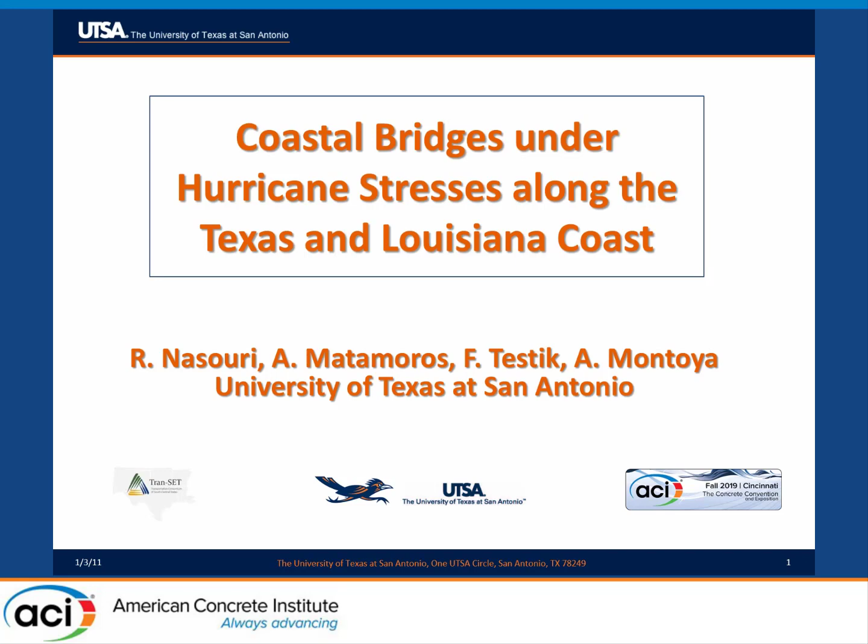So presentation today, we're interested in understanding a little bit better the nuts and bolts on damage that might happen in bridges. If we look at past events like Katrina, where there was significant damage to coastal infrastructure, the risk we face in terms of hurricanes is just as big, or by many instances higher, than we face from earthquakes, and I don't think we have paid enough attention to it.

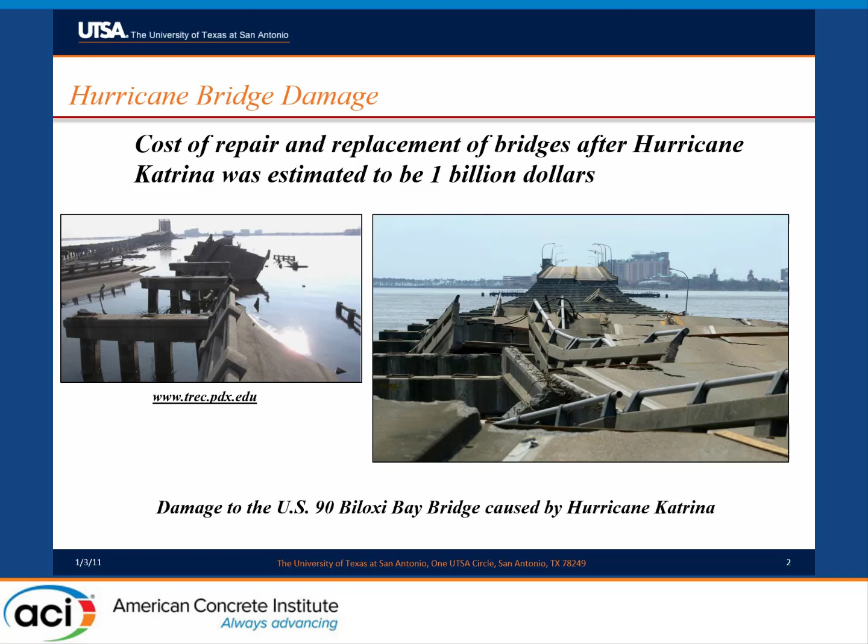Certainly there's a lot of work to be done from the analytical perspective and new tools to be used to address that problem. So the focus of our work is estimating hydrodynamic response of bridges.

When we look at the hydrodynamic forces on a bridge, there are a set of parameters that are going to affect how big that force is and how likely the bridge is to be damaged.

Some of them are related to the water itself: the wave, the shape of the wave, the period, wavelength, the wave height, and in some context the storm surge as well. But there are also parameters associated with the bridge, among them the geometry of the bridge, the flexibility of the substructure, and others.

Our development of design provisions for hydrodynamic forces, even though people have made efforts, I don't think we have invested anywhere nearly enough. There's a couple of approaches commonly cited in the literature, by Douglas in 2006, which is a simpler approach to estimate hydrodynamic forces.

And then there is the AASHTO approach in 2008. The equations are far more elaborate than the equations cited by Douglas, and I think we're still learning about how to best utilize those equations.

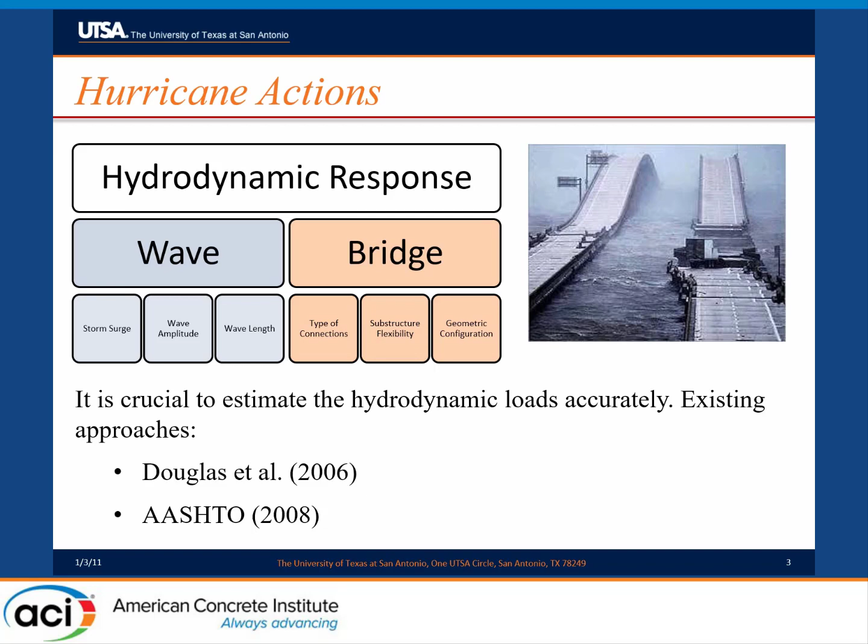So in the broad sense, if you look at the 2008 AASHTO provisions, which I believe were developed as the byproduct of a pool fund study, they identified two cases. They think of it in terms of uplift force and horizontal force, and these two don't necessarily occur concurrently, so there are equations for estimating the maximum horizontal force on the bridge.

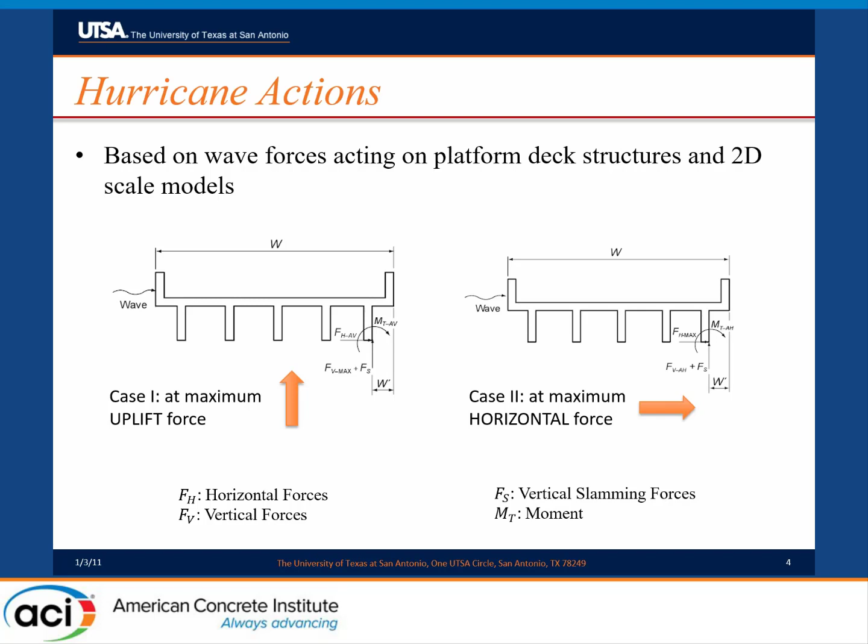And then the uplift force associated with that, and vice versa: you can estimate the maximum uplift force and the horizontal force associated with it. The provisions would have you evaluate both cases to identify which one's more critical, based on a given set of wave parameters, being wavelength or storm surge, wave height, and so on.

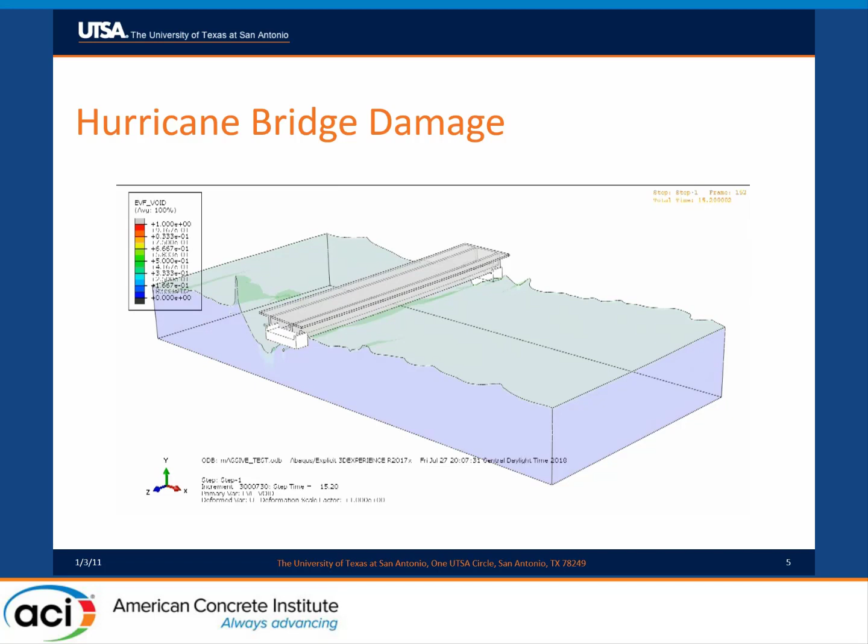What happens during a hurricane is you get waves impacting bridges and causing unseating, and then afterwards you see a lot of damage. A simplistic way to approach this would be to say, well, you restrain in the horizontal direction and you're going to take away the problem. But that's not necessarily true.

If we look at damage images after Katrina, there were spans that had some reinforcement through the connection, and the uplift forces were so strong it was ruptured. So having shear keys is not a guarantee that the bridges will subsist, and I think that's something we need to take to heart also when we're designing new infrastructure to avoid that problem.

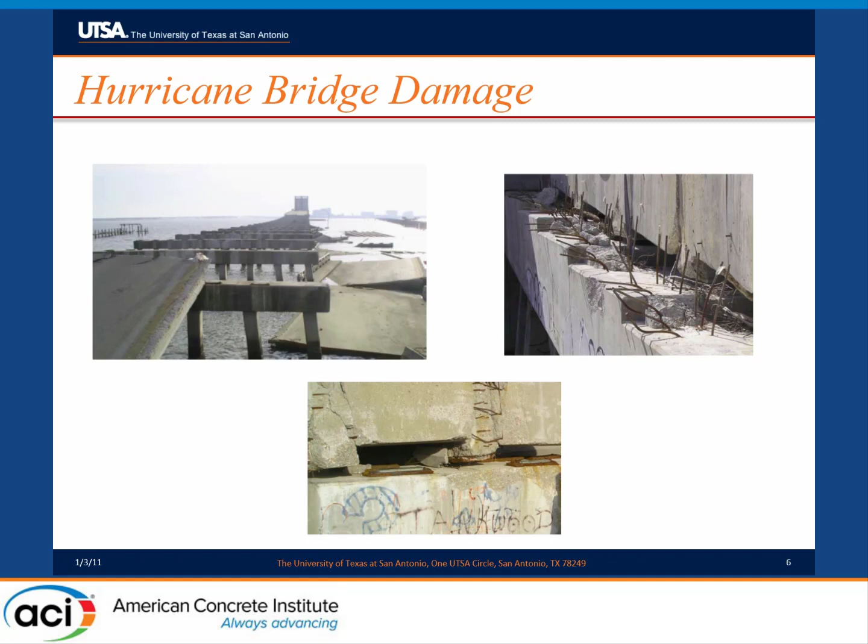So as I was mentioning, the methodology we chose tries to take advantage of some of these multi-physics fluid structure interaction tools that are becoming available, techniques like coupled Eulerian-Lagrangian analyses, among others that are available. So when we started this, we went on to evaluate a few and figure out which one could yield the more immediate results.

And we began to develop some high fidelity models, which we calibrated with some experiments that are out there. Eventually our goal is, like the previous speaker was saying, understanding a little bit better what the fragility is, so we can run arrays of simulations where we vary hydrodynamic conditions and bridge geometries and different characteristics to understand better what type of damage we can expect. You could also use that information to improve the way we design new bridges.

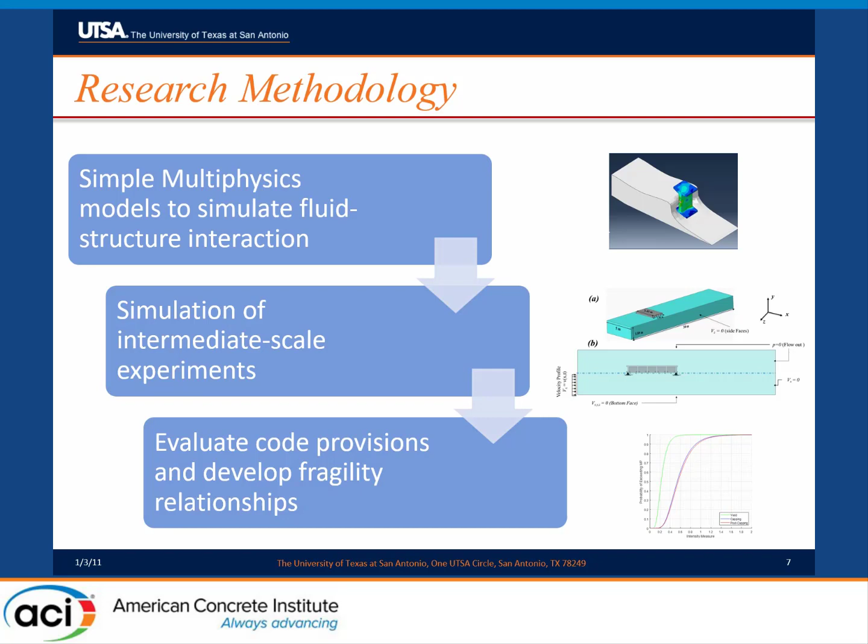So as I mentioned, the approach we adopted was a coupled Eulerian-Lagrangian approach, meaning we use different sets of equations to model the fluid than we use to model the solid. If you're a structures person like myself, you're very comfortable in the Lagrangian domain and quite comfortable with equilibrium equations. We do a lot of that here in ACI.

But folks who work in the fluids domain use a different coordinate system - a Eulerian coordinate system. It's a little bit different. There you work in terms of equations of state, and you have different sets of equations.

So a lot of analyses today would have these two approaches implemented separate from one another. Somebody would do a Eulerian type analysis assuming the structure is rigid, then estimate forces and pressures on the face of the structure, and then come to a physical model, a Lagrangian model, and impose those forces.

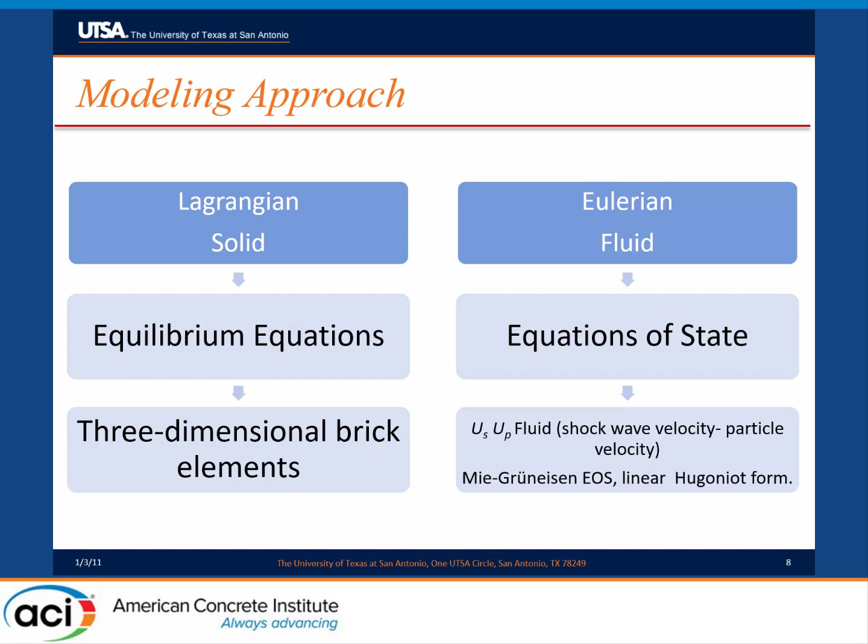What we're trying to do is couple the two, solve simultaneously, so the flow and the deformation in the structure can change in response to changes in each other. They will interact with each other. So as I was mentioning, these two approaches are a little bit different.

In a Lagrangian mesh, the approach is that the points in the mesh are attached to material, and as the material deforms, so does the mesh. The mesh deforms with the material.

In the case of Eulerian analysis, the approach is the opposite. You keep the mesh in place, and materials flow through, and you track velocities for the most part as they move through the mesh, or particles as they move through the mesh.

Lagrangian meshes are very good at dealing with small deformations. Eulerian meshes are much better suited in situations where you have fluids, where there are very large deformations, or even in solids, when the deformations are going to be very, very large.

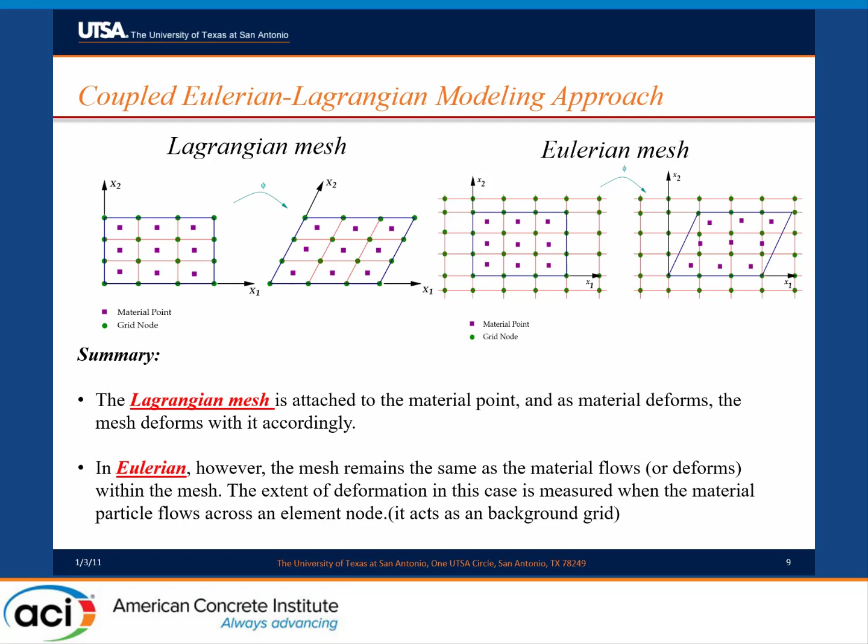Because every one of us who's done a little bit of finite element work, or even simpler analysis, understands that in your Lagrangian mesh, as things begin to deform excessively, all kinds of numerical problems arise. So that's the advantage of Eulerian meshes over Lagrangian meshes.

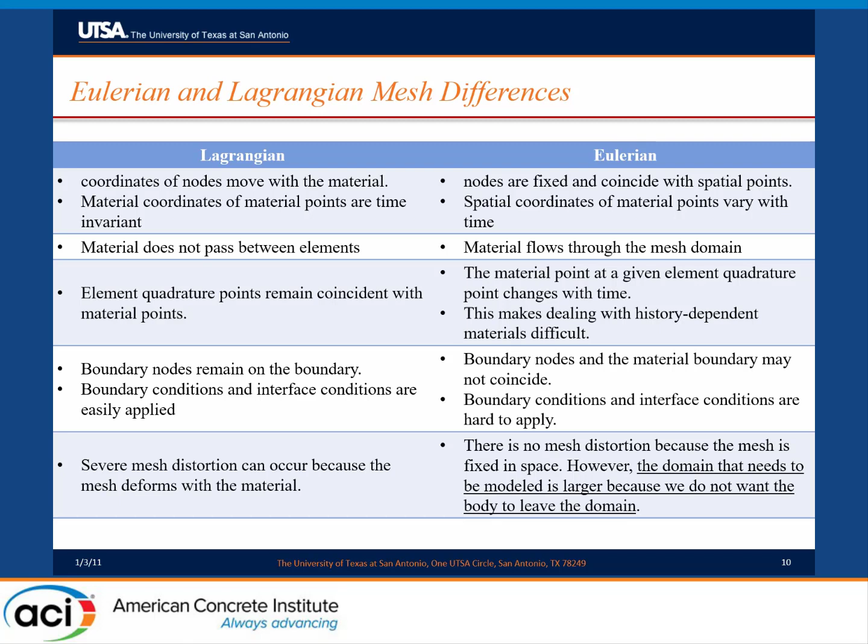These are some of the features that I was mentioning, probably a little bit late in the day, so we'll say that I already covered that. And I'm going to show you some of the simulations.

This is a very simple simulation just to illustrate what's going on with the fluid, the flow. To model the effect of both the fluid and the solid, it is important that you model the velocity field appropriately, and that your fluid is able to adapt to changes in the shape of the solid, so you get proper flow around the solid.

As you can see, if you look at the bottom of that I section, the fluid behavior here is highly turbulent. It's very, very difficult to simulate with a simple model that type of interaction.

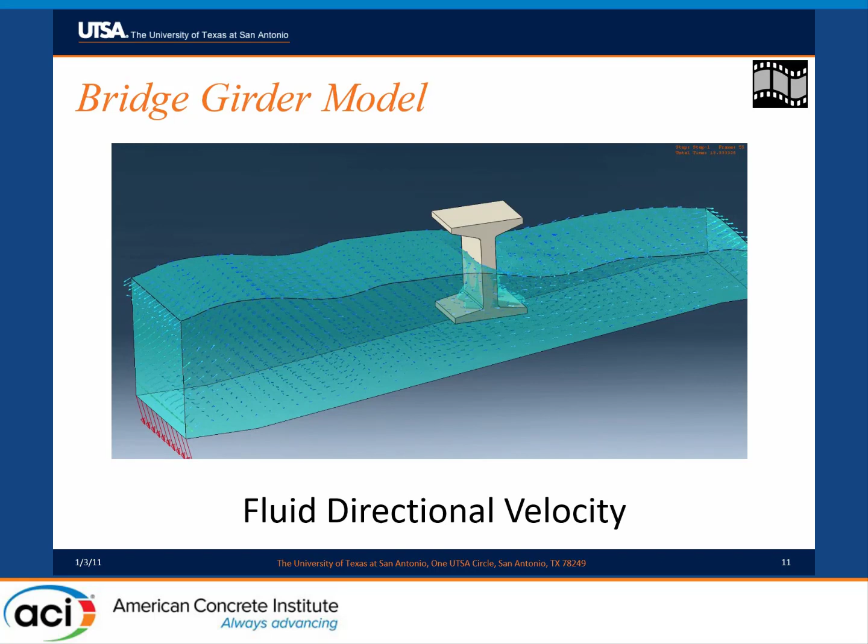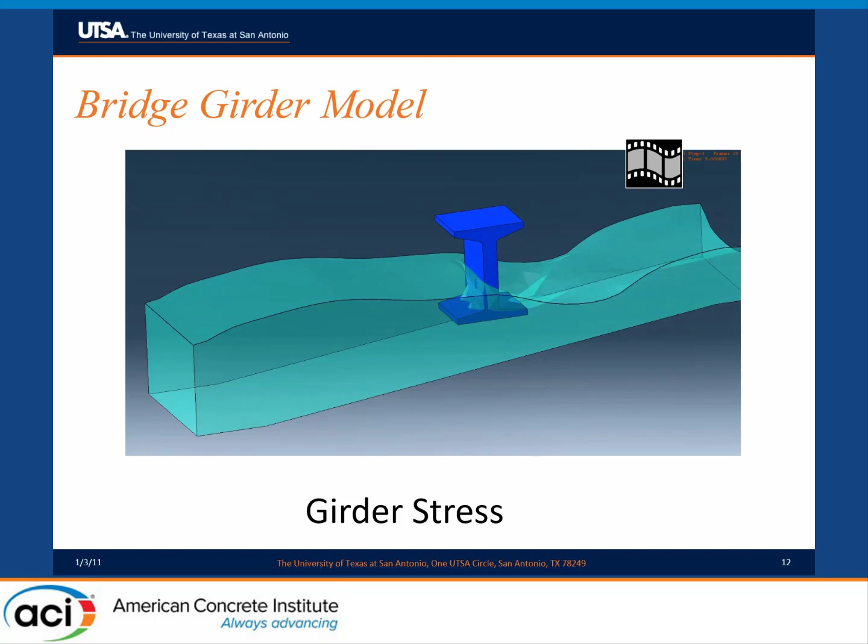At the same time, we're concerned about what is happening in the solid. So in this case, we're amplifying stresses significantly, but the point being is that as the fluid impacts the solid, then you calculate stresses and deformations in the solid. So the two are speaking with each other in real time.

I think one of the biggest challenges we face up front is to develop some confidence in these models before we go out and extrapolate and look at a wide set of parameters and variations, and we have to be able to trust what the numbers are going to give us. That's one of the motivations for using this type of analysis.

Fluid structure interaction problems are very, very difficult to simulate in the lab. They're very expensive. Flumes are not big enough. So they typically suffer from two problems: the scale factors are very large, structures are very, very small compared to prototypes, and of course there are some size effects involved, and that limits the ability to project what you learn from flume tests to an actual bridge.

And then, of course, the other problem is people typically don't simulate the substructure in their flume test. Everything is rigid and fixed, so you're missing what might be a very important dimension in the response of the bridge.

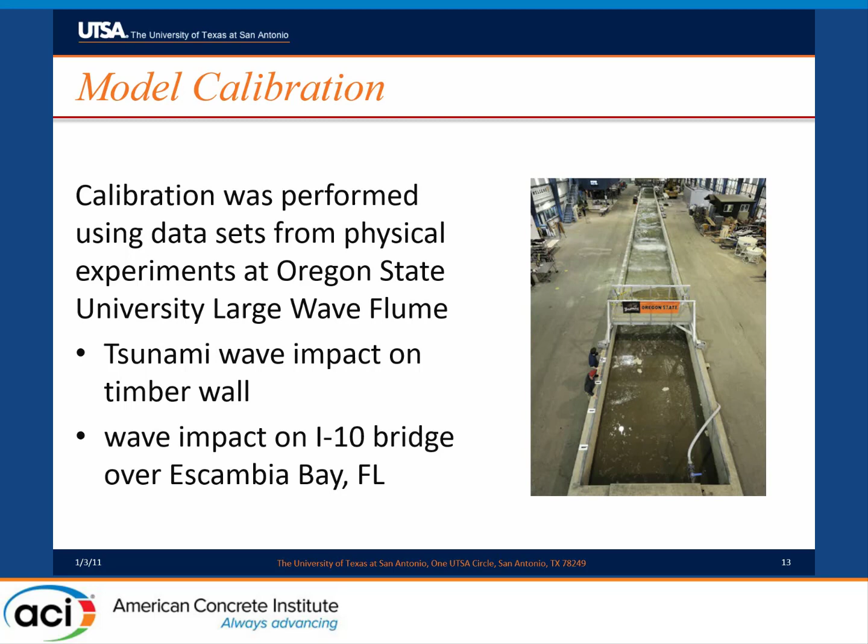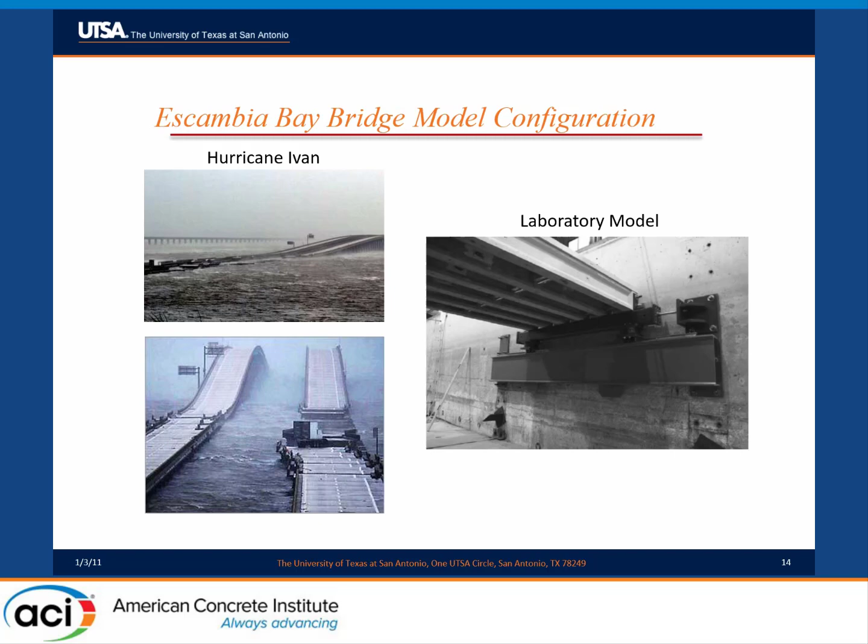We looked at some tests done at Oregon State, some funded by the National Science Foundation, where in their flume they simulated the impact of a wave on a timber wall that was instrumented. There's also a study on a 1:5 scale model of the Escambia Bay Bridge, which was damaged during Hurricane Ivan, where springs were added to the bridge to study the effect of substructure flexibility on the total response - something seldom done, and certainly not done in the development of the AASHTO equations in 2008.

So we built a finite element model of that bridge. As I mentioned, this is a coupled Eulerian-Lagrangian approach. The solid is modeled in the Lagrangian domain, the fluid defines a Eulerian domain, and we define boundary conditions that allow water to come into our model and go out of our model.

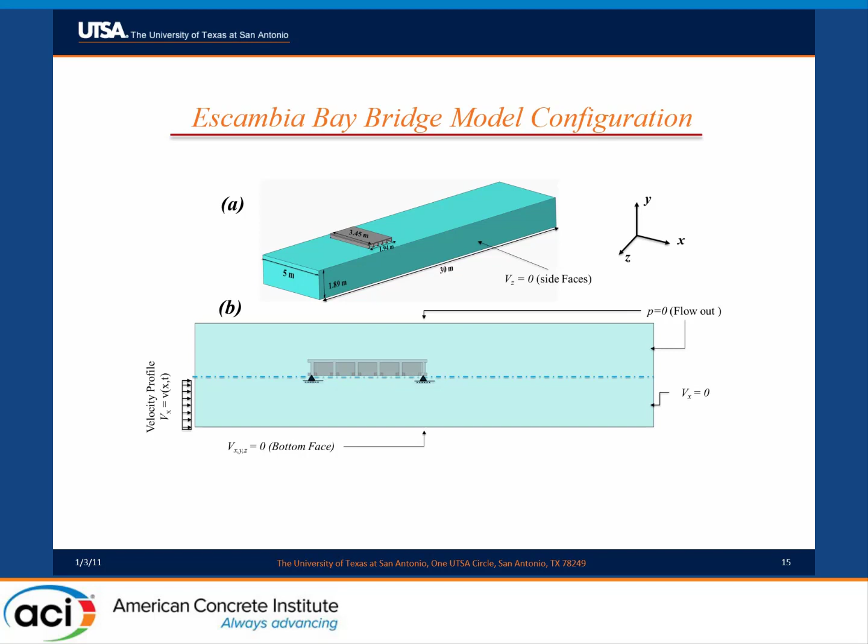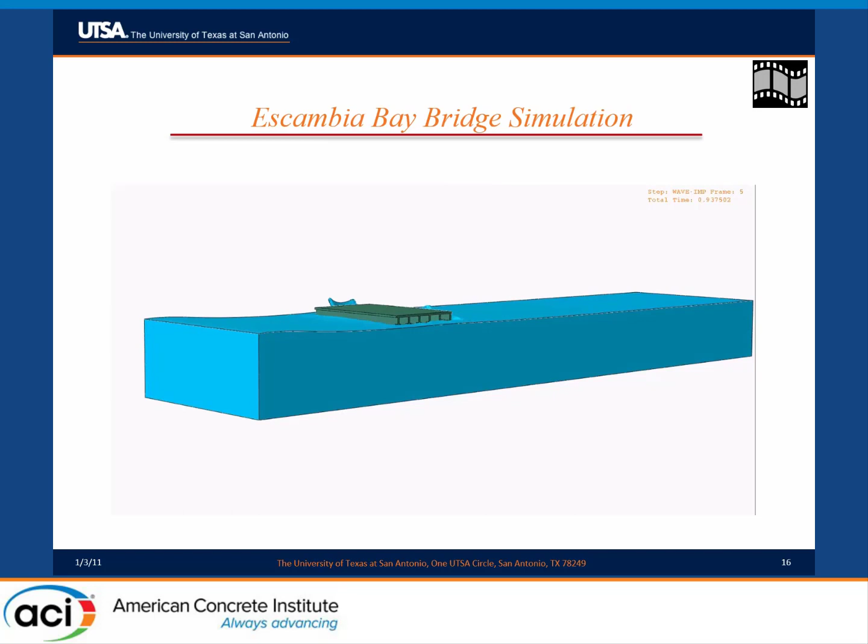This shows a typical model where we set the storm surge level right below the bridge girder, and then simulated a wave that impacted the bridge. It may seem simplistic when you look at it, but we spent quite a bit of time learning how to simulate waves so that they have the velocity, amplitude, and wavelength we actually intend for them to have.

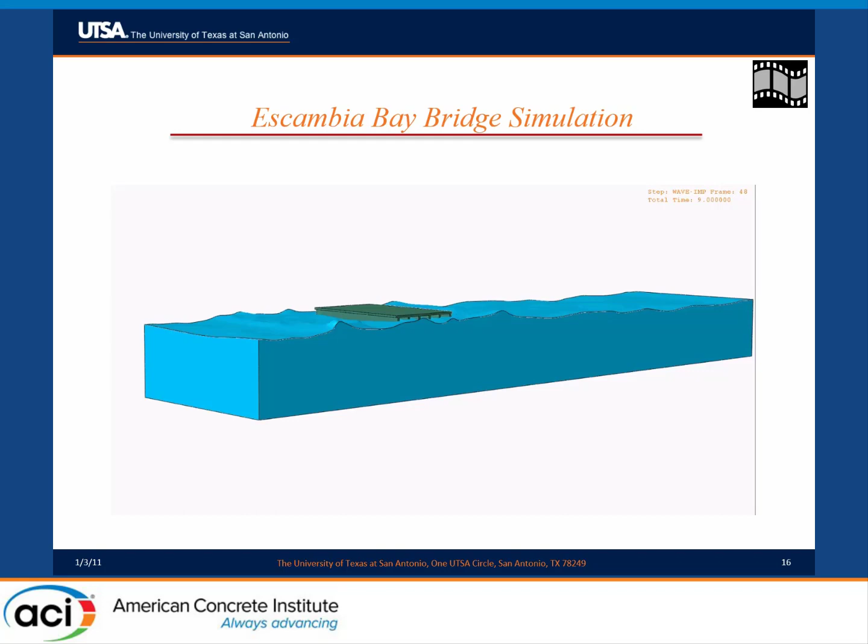So there's quite a bit of trial in understanding a few tricks of the trade in order to get this thing to work. So when we first ran our first series of simulations, we were just trying to compare what happened in the Oregon State model with our computer models.

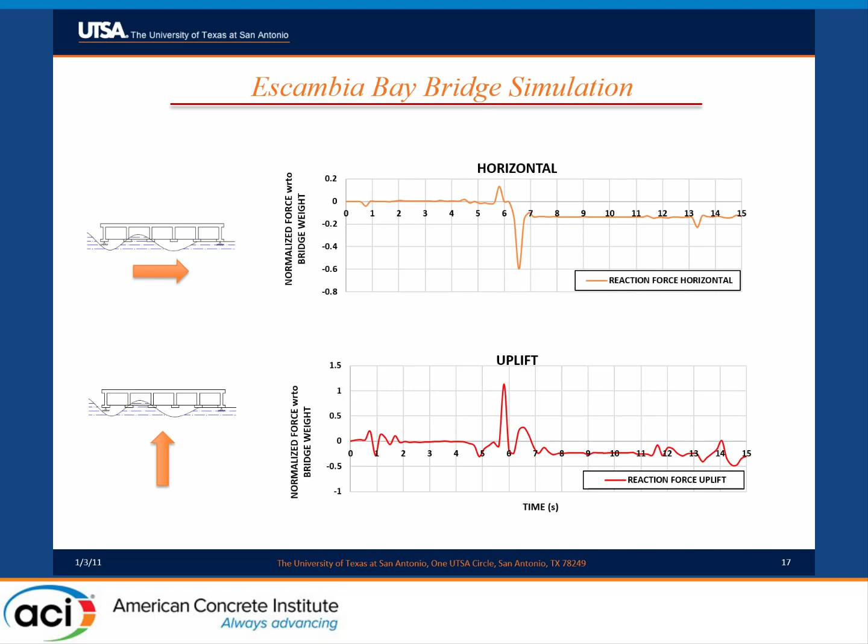We computed horizontal and uplift forces. You can see there, the horizontal force for this particular simulation run was almost 60% of the weight of the bridge. The uplift force exceeded 100% of the weight of the bridge. These numbers were consistent with what was measured in that particular set of wave impacts, which was a first step in developing confidence in the way we're doing our simulations.

Then we got curious about investigating what happens when you actually include the substructure. My training has been in earthquake engineering, where you're trained to think of this as a dynamics problem in terms of the structure - it's subjected to a certain impact force, and then it oscillates. So it stands to reason that the magnitude of forces the structure sees has to depend on its dynamic properties. If you neglect the substructure, and it's flexible enough, you're neglecting an important part of the response.

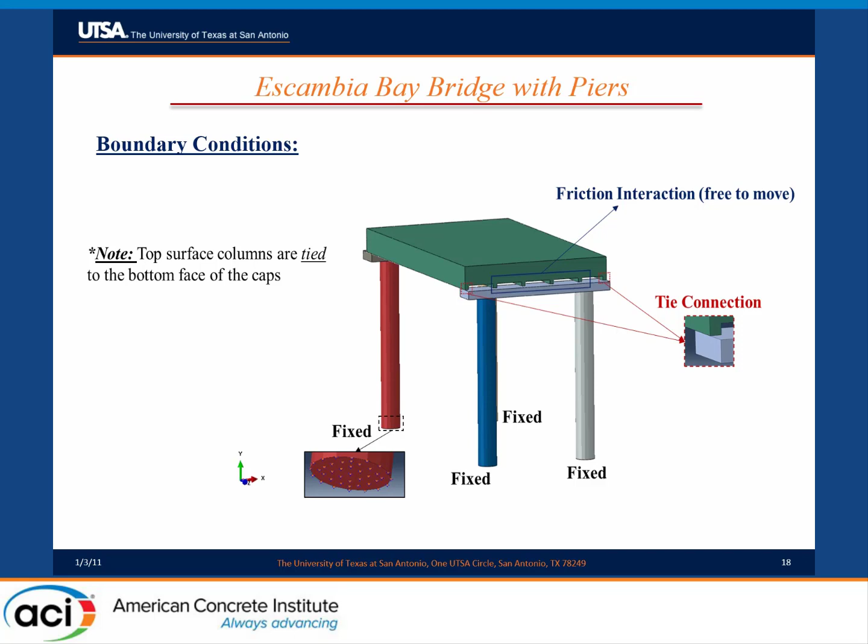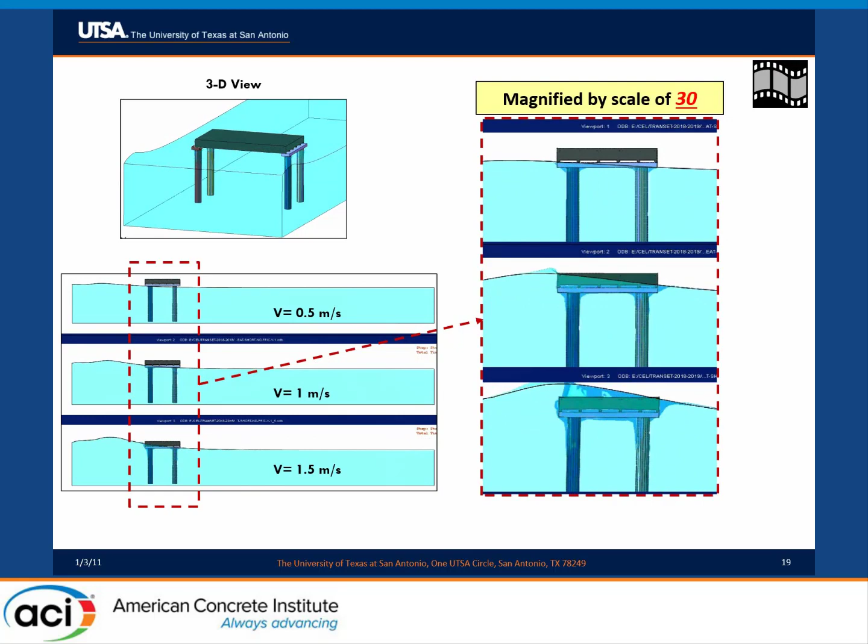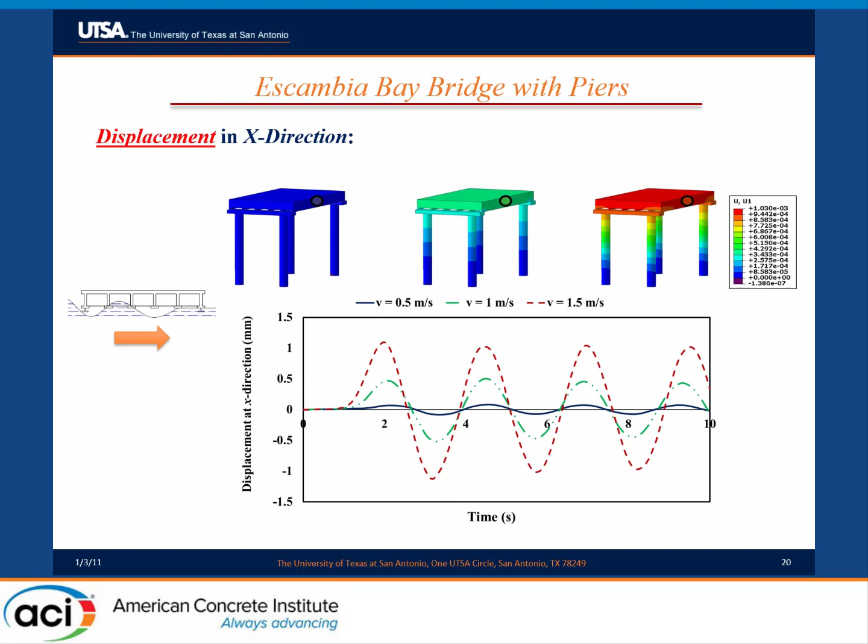If we look at this in more static terms, you can see the red curve is the fastest wave velocity, and the black curve is the slowest wave velocity. So there's a significant difference in the amount of displacement the bridge undergoes depending on wave velocity.

That's one of the things. And then, of course, there are differences as well in the magnitude of the uplift and shear forces depending on the wave velocities. But the correlation seems to be there - faster waves have a bigger impact, and they generate larger uplift and horizontal forces.

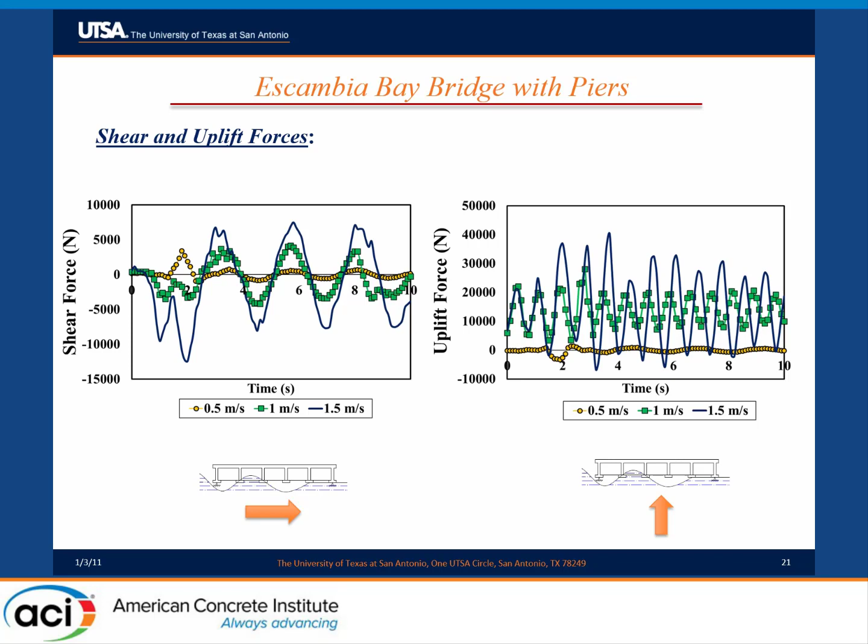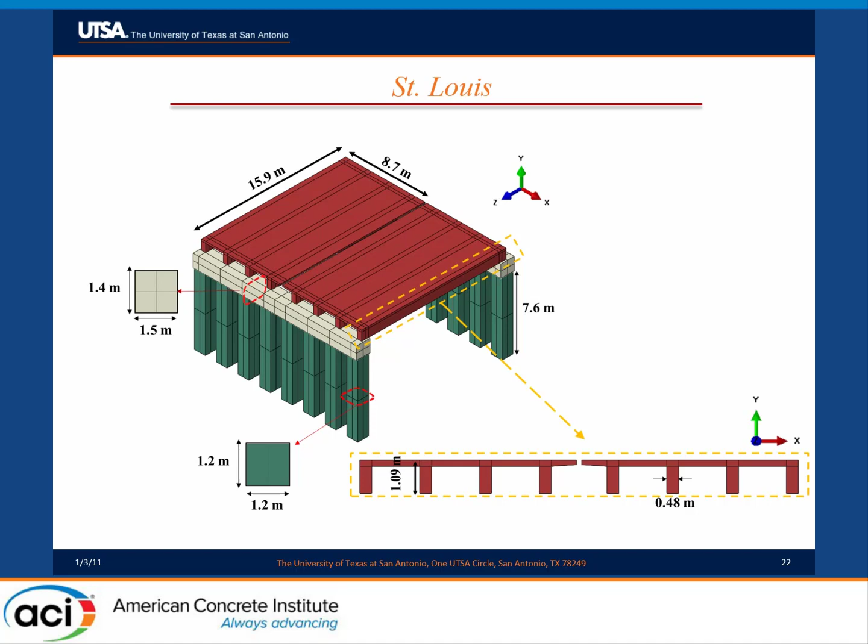We looked at a couple of other bridges that had been damaged during storms, not only the Escambia Bay, but also St. Louis and Biloxi Bay bridges. It's a 20-minute endeavor, so I don't want to bore you with an endless stream of results - I'm just going to show a few for the St. Louis Bridge. In this case, we started looking into what happens when you change the flexibility of the substructure by changing the length of the piers.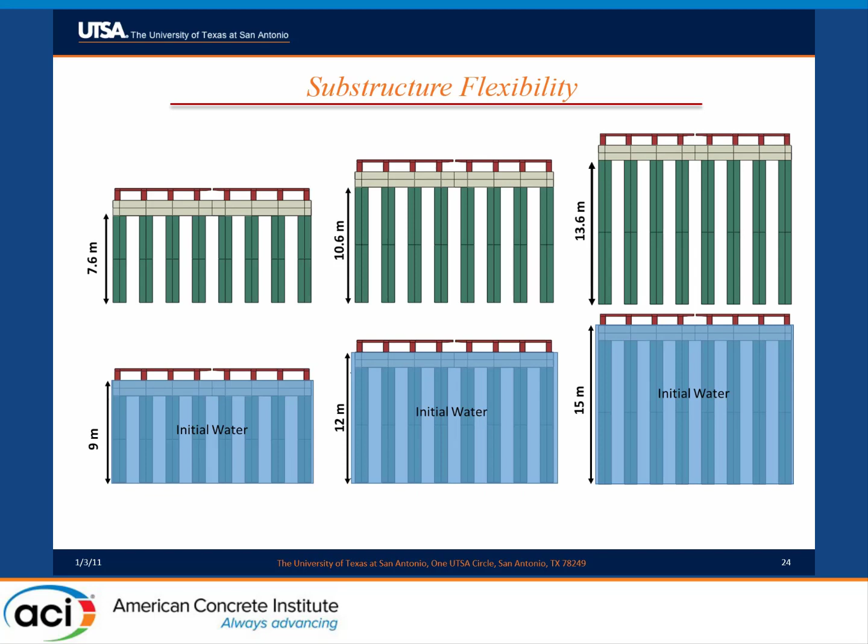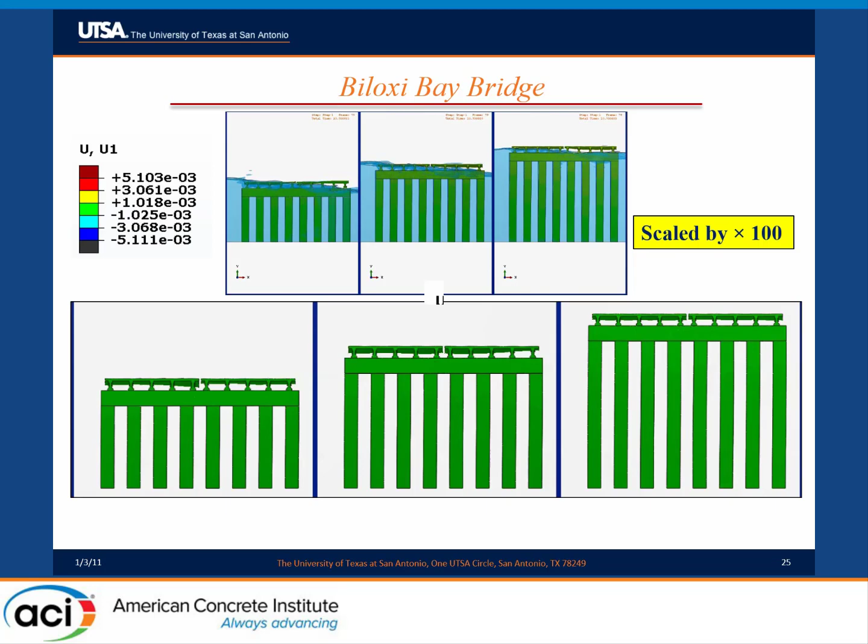These are the results that illustrate, again, in terms of displacements, for the same wave velocity, you get significantly larger displacements for the substructure when the substructure is more flexible, which is to be expected. Then the question arises, what does that do in terms of forces?

You do see differences in forces, and as the structure becomes more flexible, there's less of an impulsive response, and things tend to simmer down. So including that flexibility is actually toning down the magnitude of the forces.

We still struggle, and we're working really hard to figure it out, and this happens in the tests. You see that there are really large spikes.

If you go to the AASHTO formulation, for example, they take readings from flume tests, and when you see a spike like that, they break it down into what they call a quasi-static portion of the total force, which is the more gradual wave-like measurement of force. Then they call the other part a slamming component, and the AASHTO 2008 expressions give you expressions for both the quasi-static and the slamming component.

From my point of view, in terms of the modeling of this, when I see spikes like those, they always make me very uncomfortable. I don't know if these are a function of numerical noise that is going in there, or how much of this is real.

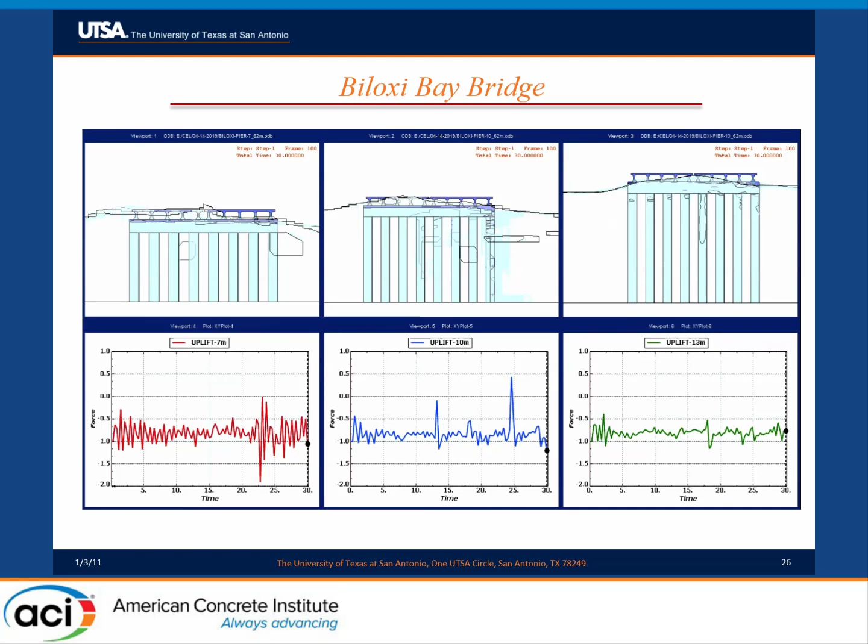So we're trying to work to ascertain that, because it is inherent, and that's what makes simulating this problem very challenging. You do see those spikes also in the flume test. It's not only in the finite element analyses that they show up.

But if you get past that, there are differences in the response. In this case, we're intrigued because the intermediate height seems to be the one that responded more in terms of shear. We think that might be showing that the periodicity of the bridge with respect to the duration of the impulsive force might be having some effect.

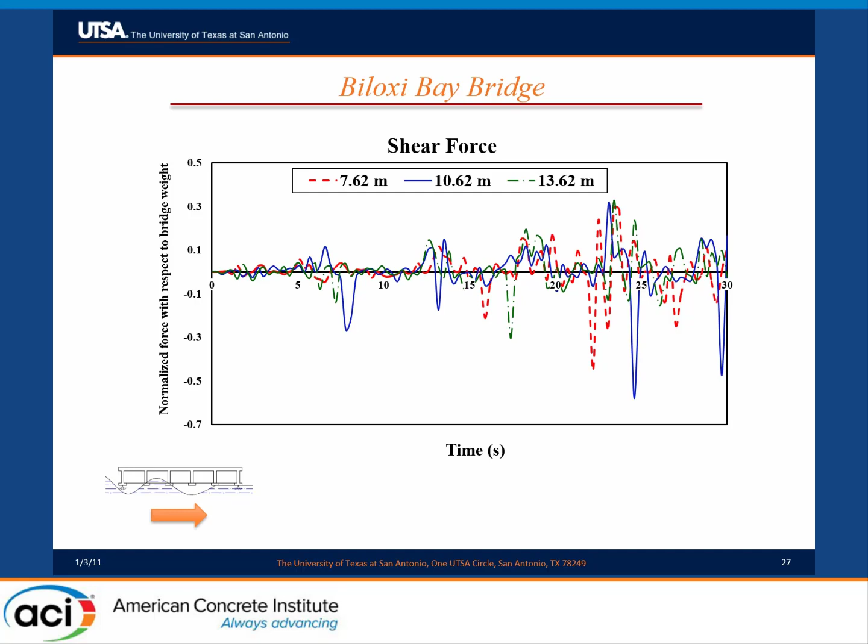We can't assume that it's going to be the same for all bridges. It's going to depend on the flexibility of the substructure. Some of them are going to react more, some less. We see the same type of answer with the uplift forces, where some geometries seem to react more than others.

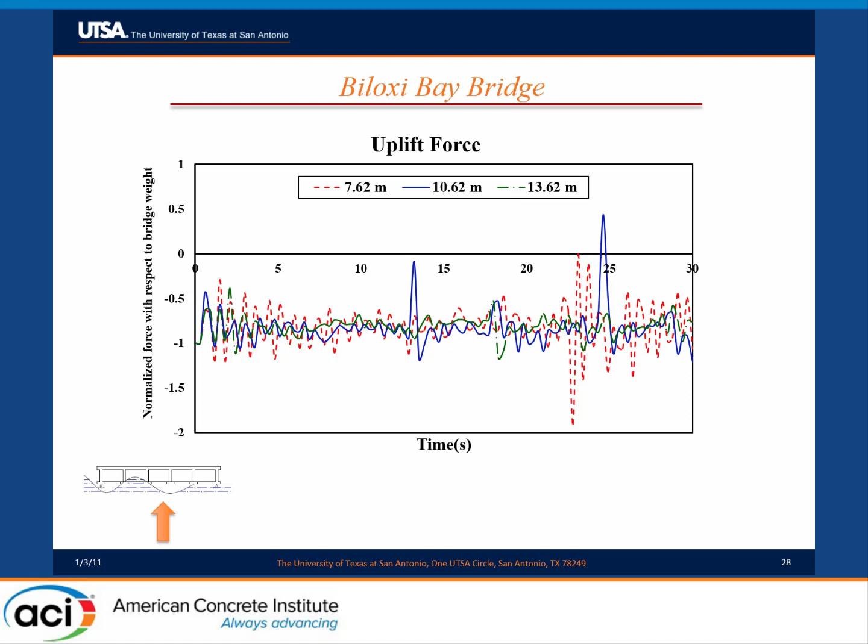So that's something for us to work on more, refine, and try to understand. We asked that question, and we have other efforts ongoing trying to understand how our simulations fit with respect to the AASHTO equations and the Douglass equations—what we get versus what design engineers would calculate.

You can see that there are instances in which we exceed by a little bit, and other instances in which these spikes exceed by a lot. And so that also leads us to a little bit of scratching our heads, how big of a risk that represents in terms of the stability of the structure and the damage it might receive.

That's part of a different effort. We have obtained, through a Louisiana data set, about 600 bridges, and we're trying to do analyses based on the AASHTO equations to understand how those bridge geometries respond—the equations for uplift and horizontal force—to different combinations of hydrodynamic conditions on the waves.

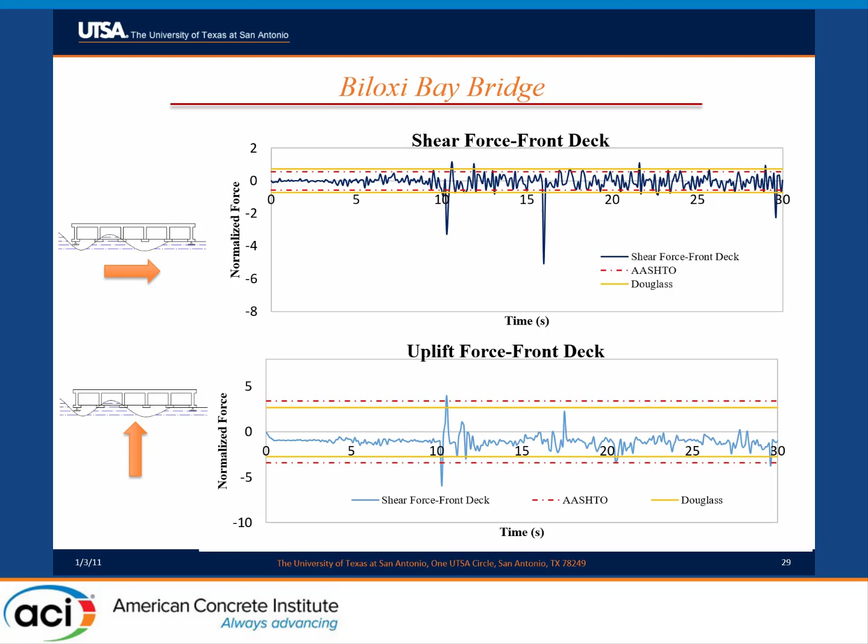And we're finding out very interesting things. I think one of the issues with the AASHTO equations is that they were calibrated on the basis of the Escambia Bay Bridge—there was one set of flume tests used primarily to simulate that. I don't think we've done enough work on validating them and understanding when there may be circumstances where we might get into trouble.

So my last slide, I promise, I know my time is up. We think that we are obtaining some interesting results with this CEL technique. We certainly still need to do some more homework to feel more confident about it. We think that accounting for foundation flexibility did in fact have a significant effect on the hydrodynamic loads and the response of the bridges. To sum it up, we are scratching our heads a little bit about those big spikes and what to make of them.